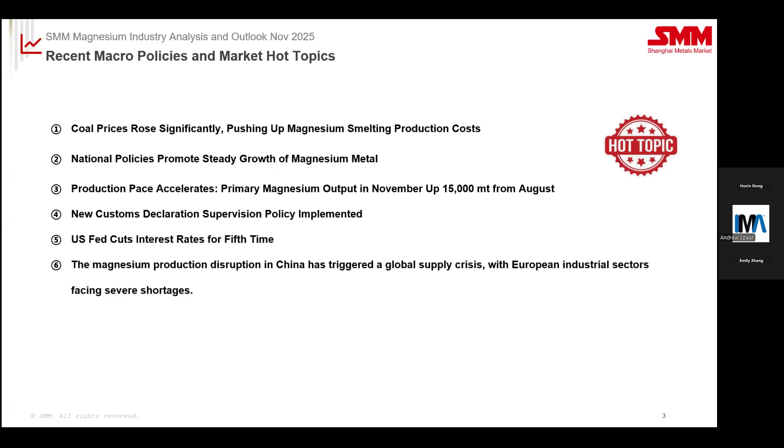The policy encouraged upstream and downstream enterprises to sign long-term procurement agreements with magnesium production related enterprises. And the third one is that the production pace accelerated. We found that magnesium smelters have been resuming operation, pushing November's output up to 15,000 metric tons from August.

Since August, post-summer maintenance and attractive profits have driven this recovery. However, the growing supply is now pressuring the magnesium price and squeezing smelter margins. So this will likely increase the inventory pressure and keep the magnesium price low. The next one is the new customs declaration and supervision policy implementation.

Since October 1st, China's export customs declaration supervision policy was tightened. According to the new regulation, enterprises acting as export agents through methods such as market procurement trade and comprehensive foreign trade services must simultaneously report the company's information and the export value, ensuring the export when handling the

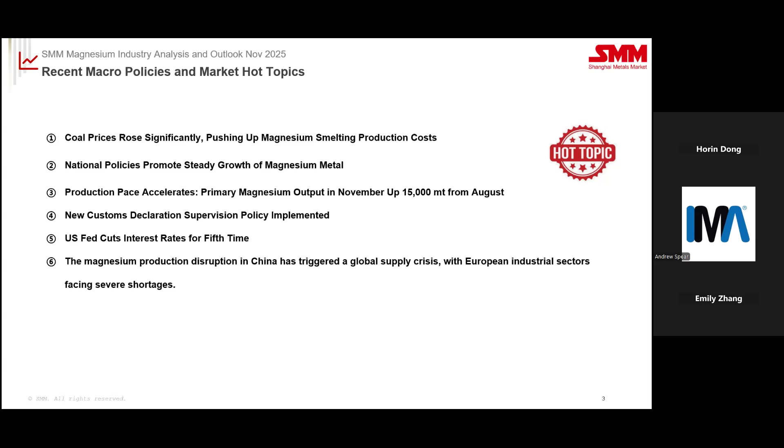The sixth one is that this year China's magnesium production accounts for nearly 90% of the global magnesium supply, so the production cuts have led to a sharp decline in European inventory levels, which could last only a few weeks, and this will further impact downstream industries such as automotive and aerospace that rely on magnesium alloy. This incident once again highlights the fragility of the critical metal industrial chain with concentrated production, and the urgency of supply chain resilience.

So here we can see the price review and analysis. Last time we talked about the first half year, so this time we will focus on the second half of the year. From early May to early June, we observed that the magnesium price rose initially and then fell from May to July.

Due to the early shutdown of Wutai dolomite mines in Shanxi, some magnesium smelters made large-scale purchases of this material, causing the magnesium price to gradually climb. Then some magnesium smelters returned to more rational operation and speculative demand withdrew from the market, and the magnesium price returned to a more reasonable level and thus declined.

Then we can see from late July to late August, with the arrival of hot weather, magnesium company profits narrowed and magnesium inventory continued to decline, strengthening the floor support for the magnesium price. Meanwhile, the introduction of the national anti-monopoly pricing and the sharp rise in coal and ferrosilicon prices both affected the market in the magnesium industry.

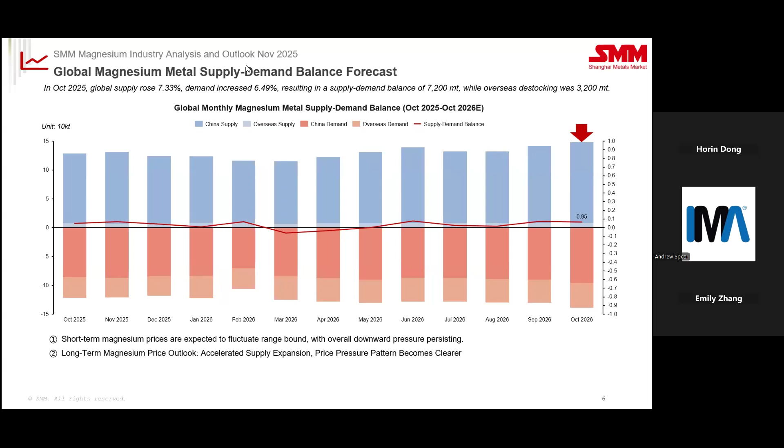So in September of 2025, China exported about 43,300 metric tons of magnesium products, up 12% month on month, and the accumulated export volume of magnesium metal for 2025 reached about 340,000 metric tons, which is down 0.27% year on year.

So the export of magnesium products in September was very strong, with major products such as magnesium ingot, alloy, and powder maintaining high export levels. Especially the export volume of magnesium ingot increased by 23.88% month on month, reaching the highest month of this year.

So, in the short term, the main driver behind the high September export was the new export policy that took effect on October 1st. And on the other hand, a decline in shipping rates for routes to Europe and other destinations in September encouraged some traders to ship earlier.

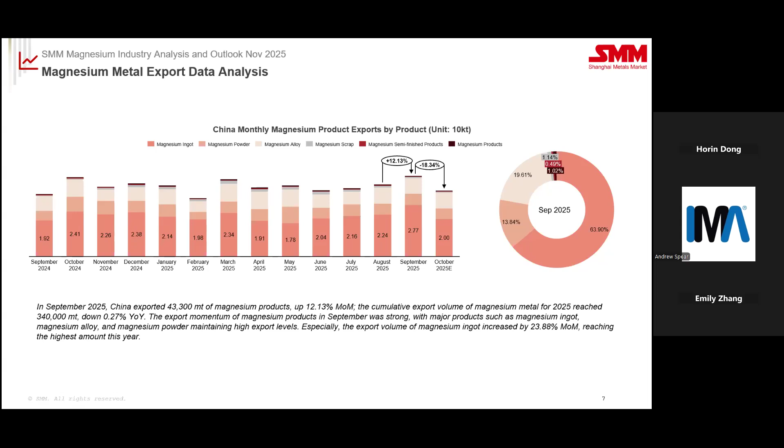So here is the China magnesium metal demand analysis. In October 2025, China's magnesium metal demand increased 6% month on month, and magnesium alloy and aluminum products account for 41% and 40% of the demand respectively, with magnesium alloy demand up 6% month on month.

Also, according to SMM data, the price spread between magnesium alloy AZ91D and aluminum alloy ADC12 further widened in October, with the average monthly price spread reaching about 3,283 yuan.

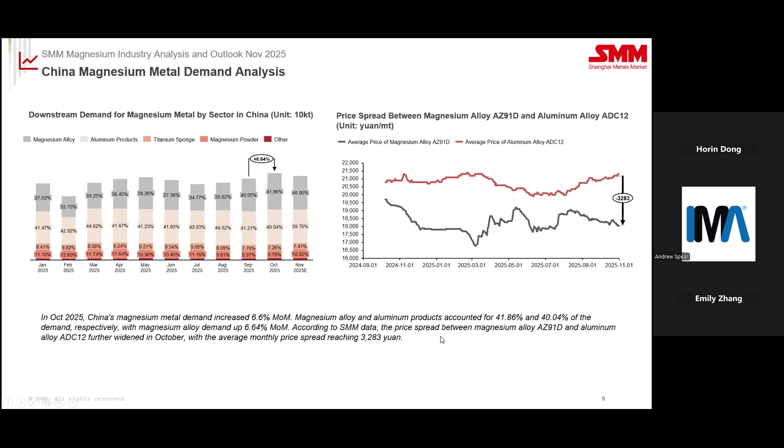So next, we will talk about China magnesium downstream development. First of all, let me introduce the China passenger vehicle monthly production and forecast. In October 2025, the NEV car retail penetration rate approached about 60%, rising to 58.7%. So in the Chinese market, NEV sales maintained growth in October, and this growth was driven by multiple factors.

So on the policy side, the clear expectation of the NEV purchase tax subsidy reduction in 2026 prompted automakers to introduce cross-year purchase tax guarantee subsidies. So consumers will purchase their cars earlier. For example, multiple vehicle brands launched limited-time offers to avoid a demand collapse after the policy adjustment. So they promise clients they will give the subsidy if they order earlier.

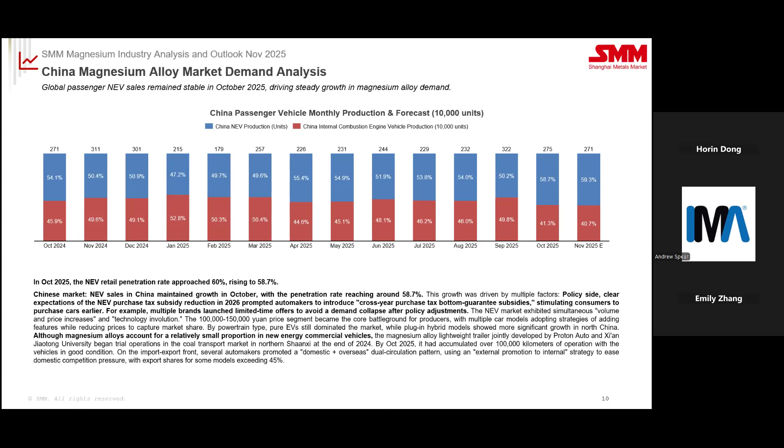So for the next one, we can see the semi-solid forming technology, which was mentioned by one client last time. So we can see injection. This is a kind of injection molding technology. Currently, we also call it semi-solid thixotropic molding technology. This technology is relatively mature now. It is mainly different from the die casting method.

So the principle of semi-solid injection molding is that the magnesium enters the barrel under gravity or negative pressure. Through the action of the heater, the magnesium chips are heated and sheared during their advance and deformed by the extrusion screw into the alloy. So the slurry is injected at high speed into the mold, which pushes the alloy at very high speed and high pressure.

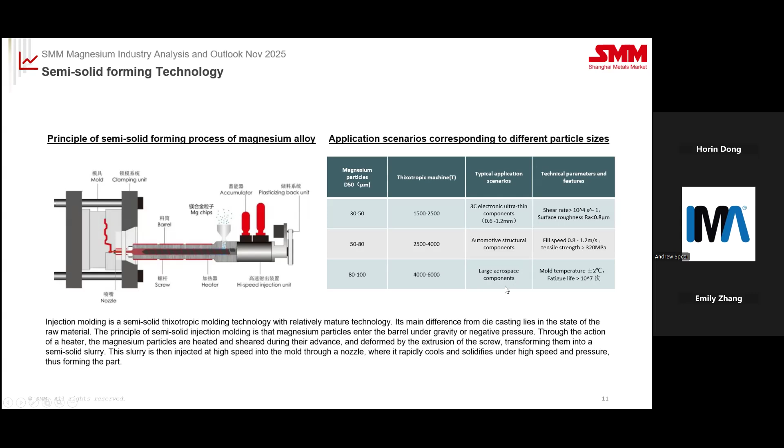So currently, the magnesium alloy production processes have different advantages and disadvantages. However, at the current stage of technology development, there is a high demand for lightweight products, which are generally thin-wall and high-pressure products. So the previous casting methods no longer meet the need. For the previous method, liquid molding is more suitable for traditional automotive parts and for large magnesium alloy die casting parts like the wheel hub and the bracket.

And currently, semi-solid molding is more suitable for consumer electronics and thin-wall components for new energy vehicles, like the battery cell and high-pressure structural components. And also, there is another process called plastic molding. It's for high-load aerospace structures and components, and for long guide rails, automotive crash beams, and 3C-related products.

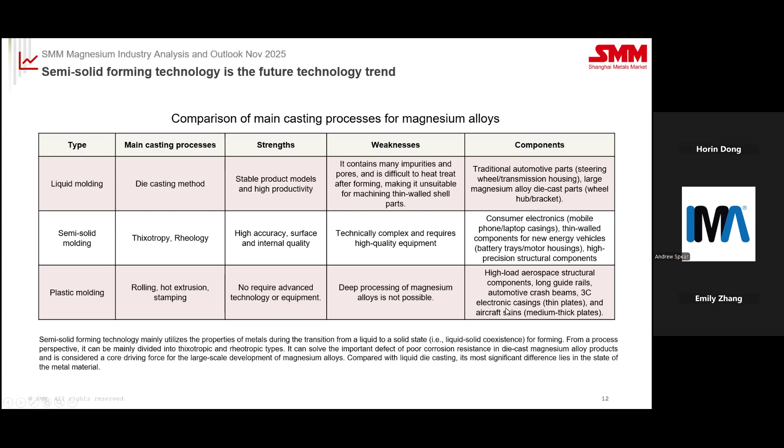And here is magnesium alloy used in the automotive field. Currently, the average amount of magnesium alloy used per vehicle in China is about 6.3 kilos. So in the short to mid term, die-cast magnesium alloy will replace aluminum alloy in automobiles, which is the main development direction in the future.

In the long term, with the maturity of wrought magnesium alloy and cold working technology, magnesium alloy sheet and strip will replace aluminum alloy sheet and strip in automobile parts. And here we break down the magnesium alloy used based on different kinds of car models.

In gasoline cars, the average amount of magnesium alloy is 4.6 to 8 kilograms. For commercial vehicles, it is more than 40 kilograms per car. And for EV cars, we break down the cars by price. The higher the price, the more magnesium alloy is used, and the range is from 6.9 to 35.9 kilos.

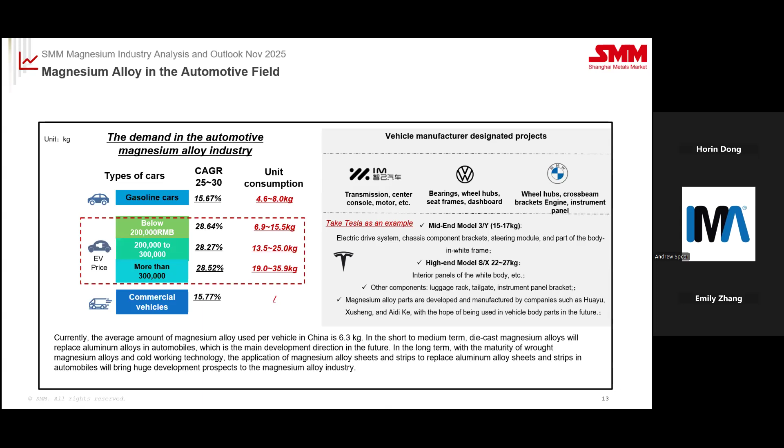And here we will introduce magnesium alloy in the electric bicycle industry. In China, last year we published a national standard called the Safety Technical Specification for Electric Bicycles. This standard asks that electric bicycles have low weight. According to the announcement, the total mass of a fully assembled electric bicycle should be less than or equal to 55 kilos, and the total mass of one using a lead-acid battery should be less than or equal to 63 kilograms.

And we can see the weight of magnesium alloy used on different bicycle models also has different unit consumption. For the high-end models, each electric bicycle uses 7 to 10 kilograms of magnesium alloy, and for the low-end models, only about 1 to 2 kilograms per bicycle. Some enterprises in China like Luyuan and Yadea have also started to develop magnesium alloy for use in electric bicycles.